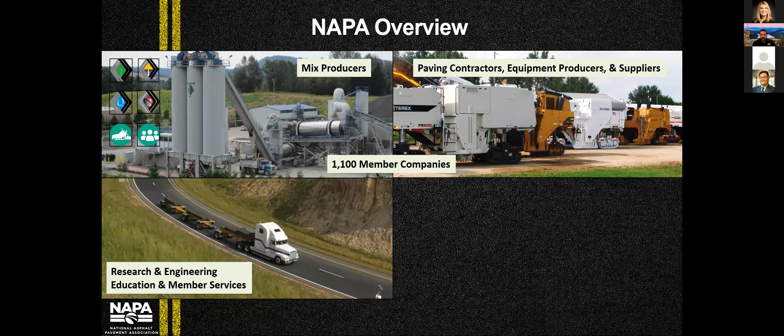We have an education and member services group, and they handle things like our meetings and webinars, which have been really popular this past year for, I think, obvious reasons, and other educational activities like that. Member services include awards, diamond commendations, and that sort of thing.

The last thing we do - we have a really good federal advocacy team. This includes lobbying on Capitol Hill for support of highway and airport investments, and also addressing environmental health and safety regulatory issues. So there's a general overview of NAPA in case you have any kind of curiosity about that.

So I'm going to start with sustainability, and I'll open by saying that sustainability is not a new concept. This is Cicero, who was a contemporary of Julius Caesar, 44 BC, ancient times by this day. In one of his writings, he was talking about Statius, who was a poet, and one of his statements was: he plants his trees to serve a race to come. This is the idea that you're looking out for the next generation behind you, and you're not just thinking about yourself, but future generations.

I think many, including myself, would argue that this is a sign of a civilized society, where you're looking forward to future generations.

When you fast forward about a quick 2,000 years, this is what the Federal Highway Administration defines as a sustainable pavement. They say sustainable pavements should achieve the engineering goals for which they were constructed, and I think that's an important first step - if you can't at least do that, then you're doing something wrong. Pavements should preserve and ideally restore surrounding ecosystems. And you might think, how does a pavement restore an ecosystem?

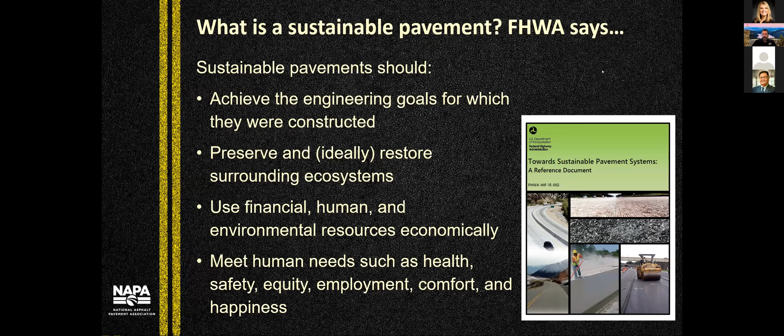So it might be work zone user delay and that kind of thing, and these are often incorporated into a life cycle cost analysis, or LCCA analysis. Then you can also think about not just the cost, but the benefits. Pavements, roadways, networks in general provide for mobility, commerce, freight, transport, and that sort of thing. So there's a lot of benefits associated with pavements as well you can think about.

From a social perspective, you can look at safety, like skid resistance. If you're using a novel material or novel mix design, you want to make sure the cars driving on that pavement are safe. Another way to look at the social aspects of a pavement is the workforce - is your workforce earning a living wage? What's the equity within your workforce and other considerations? And of course, workforce occupational safety is a component of that as well.

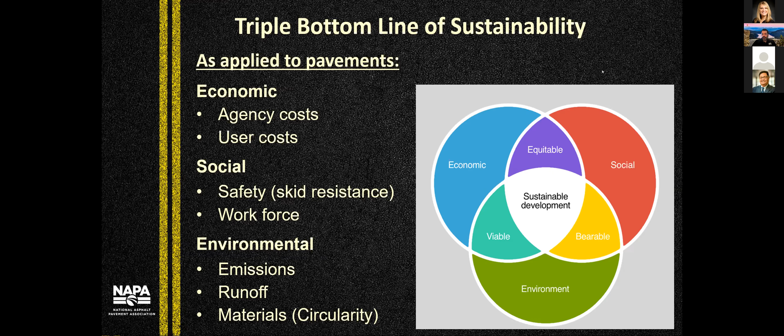So these are all ways to think about sustainability as they apply to pavements.

Now, I'd be remiss to talk about sustainability without invoking the concept of the pavement life cycle. We like to think about the life cycle starting with design, but also materials - extracting raw materials, whether it's aggregates or binders, the petroleum for asphalt binders or additives - manufacturing those raw materials, transporting them to the plant, and then mix production. These three components are typically referred to as the cradle to gate stages of the pavement life cycle.

Once you leave the gate of the plant, this is leaving the mix producer's area of control in many cases. You have transportation to your job site, construction, paving operations, moving on to the use phase - that would include things like vehicle fuel consumption, maybe lighting, and other things like that. Maintenance and rehabilitation, so this would be your mill and overlay, pavement preservation, and those sorts of activities, and then end of life. In this industry, we're a pretty highly circular economy in the sense that most of the materials removed at end of life are put right back into the mix. So that's a real positive, looking at this overall pavement life cycle.

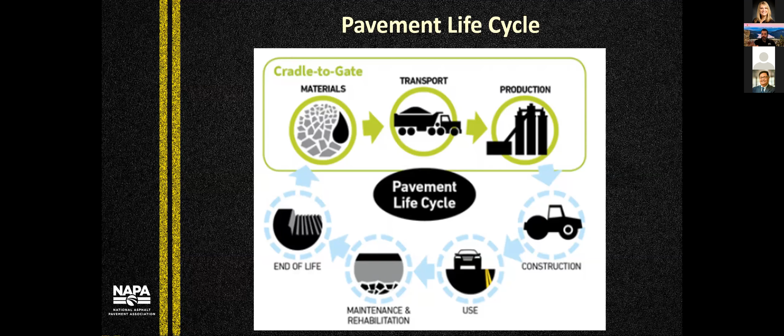So I want to talk for a minute about some of the sustainability strategies, looking at all these different life cycle stages and concepts you can apply to pavements. Looking at NCHRP this past year, they published the Sustainable Highway Construction Guidebook, and this is a really excellent read. It's for a lengthy NCHRP report, but it's actually a pretty easy read.

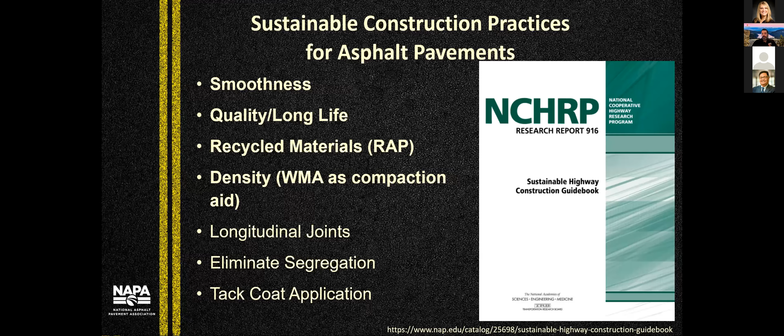Starting with smoothness. Smoothness can impact vehicle wear and tear, it can impact pavement wear and tear, it can impact fuel efficiency. I'll stop here for a second because smoothness is probably the leading component associated with pavement rolling resistance. You can make smoother pavements, and you're going to make the cars driving on that pavement more fuel efficient. This is not an insignificant value here.

When you look at the total life cycle, like I showed before, and all the emissions from a greenhouse gas perspective, the lion's share—probably 90% or more in many cases—of that impact is going to be from the vehicles operating on the pavement itself over a long, say 30 or 40 year life cycle. This will vary depending on how much traffic the road gets, but it's a really significant factor. In fact, if you could reduce fuel consumption of the nation's fleet of vehicles by 1% by having smoother, well-maintained roads, that would be equivalent to about all of the emissions from material extraction and mix production combined for the entire U.S. industry, with just a 1% improvement in fuel efficiency. So this is a really big deal.

And then other factors—noise, safety—if you can improve these things, you're going to create value for the people driving on the roads and nearby residents or businesses next to a road. So these are all things to think about with respect to smoothness.

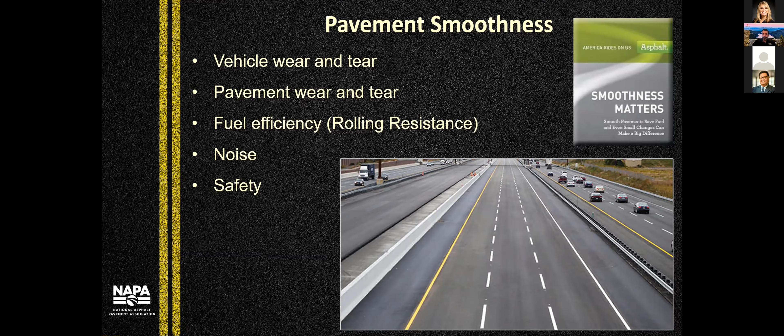The next one I want to talk about is long life pavement design, or perpetual pavements. This is the concept of designing a pavement so that it's never going to actually experience structural rutting or cracking. You're going to have to maintain the surface wearing course, obviously, but you shouldn't have to go in and do a reconstruction or redo the base. To design this pavement, you're typically going to have a higher initial cost for the agency because you're designing a pavement with a thicker section than normal. But you're going to benefit over the life cycle by reduced maintenance costs because you're not having to go in and reconstruct that pavement in the future.

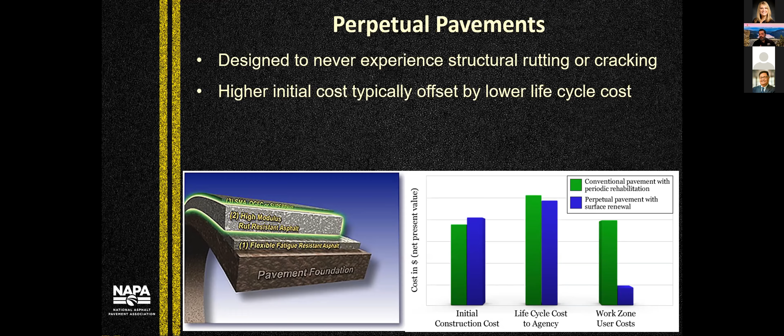So I'm going to turn here now to some material considerations. For the last 10 years, NAPA has been conducting a survey of industry on use of recycled materials and warm mix asphalt technologies. We have a great turnout on this—we get more than 1,000 plants every year that submit data. So it's a really good snapshot of what's going on in the industry.

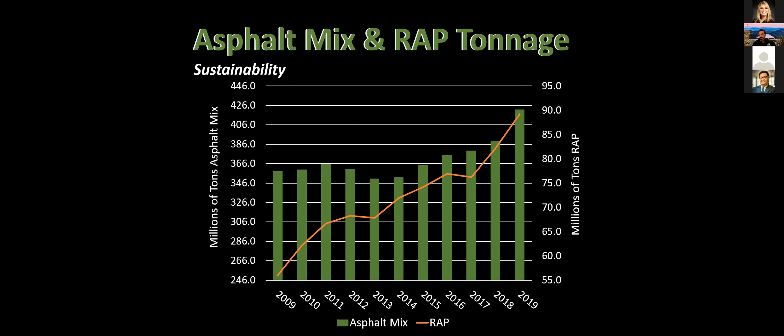The amount of RAP in an average mix has gone up from about 15% or so in 2009 to close to 21% this past year. So the amount of RAP being used in pavements is increasing. And as long as we can continue to increase that and maintain quality of our mix, quality of the pavement, and not degrade quality, then that's going to be a net positive.

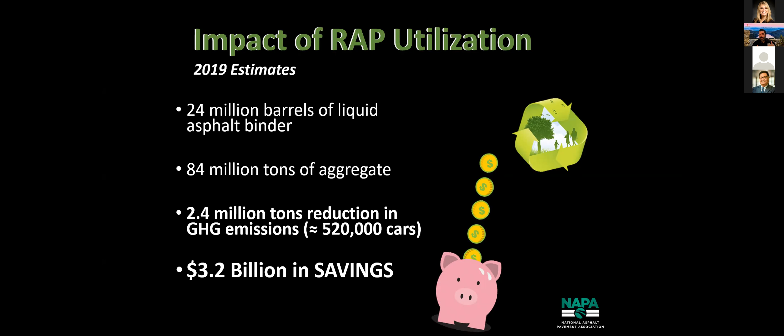In fact, when you look at 2019, the use of RAP reduced the extraction of petroleum for liquid asphalt binder by 24 million barrels. And it reduced the amount of aggregate that had to be blasted out of the ground and crushed and screened by 84 million tons. These resulted in a net savings of 2.4 million tons of greenhouse gas emissions, approximately 500,000 cars worth of greenhouse gas emissions, and over $3 billion in economic savings. So clearly we're creating value through using RAP, and this is a really good direct measure of that.

The other thing we look at in the survey is use of warm mix asphalt technologies. When we started this survey in 2009, only about 5% of the mix produced in the US was using a warm mix technology. The past 3 years, we've leveled off at about 40% of total mix production, which is pretty significant. Now, I will say that only about half of that is actually produced at a reduced temperature, meaning the other half, or 20% of the mix produced, is using a warm mix technology as a compaction aid. If you're getting better compaction on your job because of this, and that better compaction translates to better pavement durability and pavement life, even that is a significant win from a sustainability perspective.

The other thing on warm mix technologies, which I don't have a graph for, but it's in our report and worth thinking about: when we started the early years of this, almost everyone was using plant foaming technologies. Now it's about half of the warm mix produced is using plant foaming, and the other half is using a chemical additive. In a lot of cases, that chemical additive is also doubling as an anti-strip agent. So if you're getting two functions out of one material, as an anti-strip and as a warm mix, that's also beneficial for our industry.

So I think warm mix is a great technology, and I'm really glad to see the progress our industry has seen over the last decade or so.

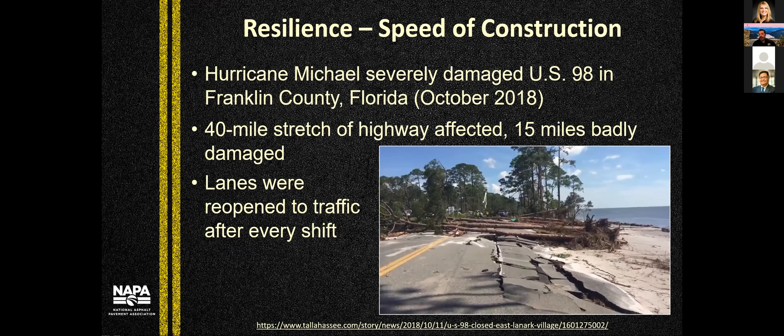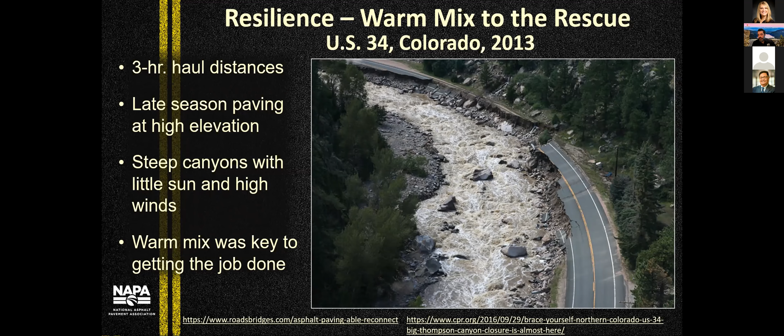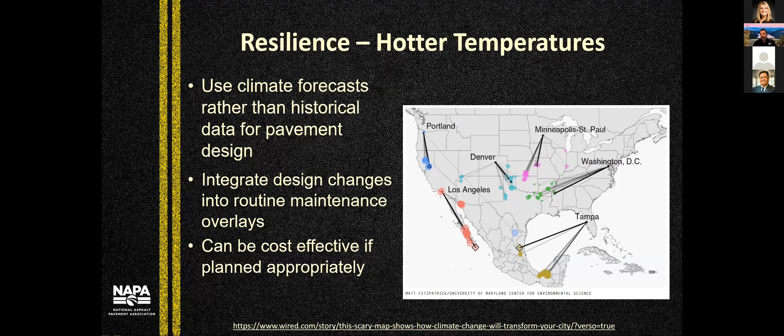The message here is to stay ahead of the game, think about the future, and start putting together the analysis you need to incorporate climate models into your pavement design programs. So that's a key aspect there.

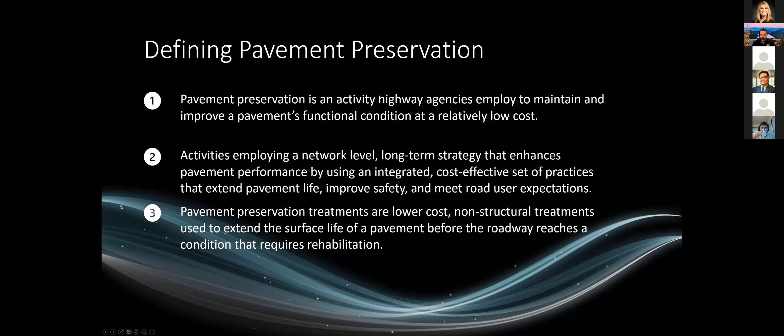All right, so the first right turn that we're going to take is picking the right road. There's a couple questions we go through when we're looking at these treatments and reviewing the projects submitted by the districts. Does the ADT support pavement preservation? Is the ADT too high? Do we have a bad mix of passenger vehicles and trucks and stuff like that?

Will the maintenance of traffic allow the construction of preservation? Some of our very high ADT routes in the Chicago area don't necessarily lend itself to being friendly to construction with preservation treatments. So it's something that we need to keep in mind and pick our treatments accordingly.

Does the pavement structure contain materials-related distresses? D-cracking, ASR, and ACR cannot be addressed by pavement preservation strategies. And is it something that we necessarily want to address? In some cases, pavement preservation strategies can actually accelerate these materials-related distresses, and it's probably not a good idea to apply those.

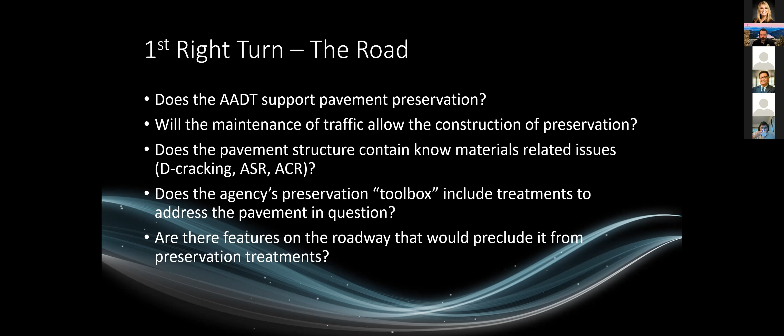And finally, are there some features in the roadway that would preclude it from preservation treatments? The first thing that came to mind for me was centerline rumble stripes.

These are coming into play a lot more in Illinois from the safety aspect, trying to keep lane departures at a minimum, but it also kind of inhibits the use of some of our pavement preservation treatments, because while they're really good at preserving the surface, they can decrease the effectiveness of these rumble strips. Your microsurfacing, cape seals, and chip seals will tend to fill these rumble strips or rumble stripes, decreasing their effectiveness. You'd have to come back through and grind them again, reducing the cost effectiveness of pavement preservation treatments, and potentially the possibility that you're getting a good seal from the environment on that roadway.

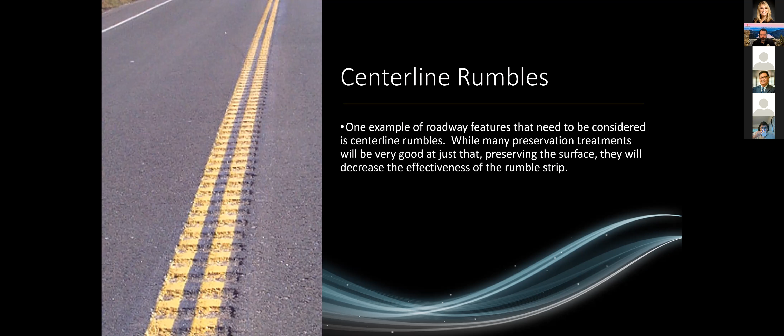So moving into the second right turn, appropriate timing. Is this roadway still in good condition that we can preserve it and keep it in a good structural manner? Do we have a good balance of service life of the existing surface and minimal distress to allow for pavement preservation? Are we at the point where we're going to maximize the effectiveness of the preservation treatment, and yet we've got a good amount of service life from the existing surface, whether it be PCC or HMA?

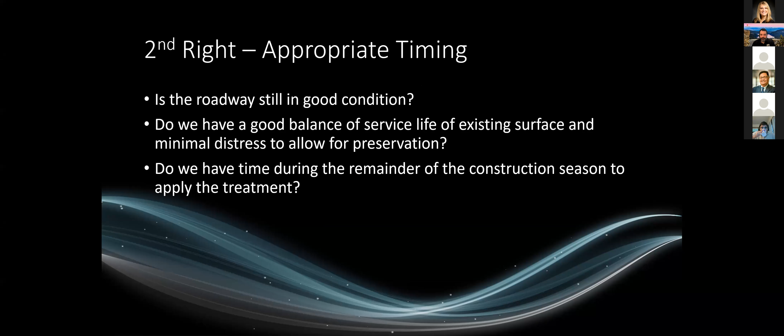Do we have enough time in the remainder of the construction season to apply the treatment? A lot of our pavement preservation treatments are very subjective to the weather. So if we apply it too late in the season or too early in the season, we might be doing more harm than we are good.

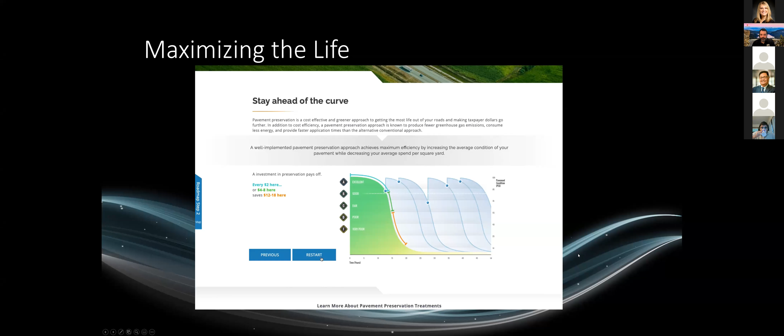All right, so the last slide on timing. There is a delicate balance. Montana and South Dakota both seal cracks after the first year of construction of a new surface, and then place a chip seal or microsurfacing after 2 years of construction. They want to get on it really early to prevent oxidation and any weathering and raveling that could happen, and it seems to be benefiting them well.

In my deeper look into IDOT's projects and our selection, the districts around the state are generally selecting projects that have a CRS of about 6.5. That's well within the good category according to our CRS scale. I think we're headed down the right road. We could potentially be picking things a little bit earlier to give the preservation treatments more of a chance at reaching their most appropriate service life. Other reports and studies have stated that approximately 5 to 7 years of life prior to a treatment is ideal.

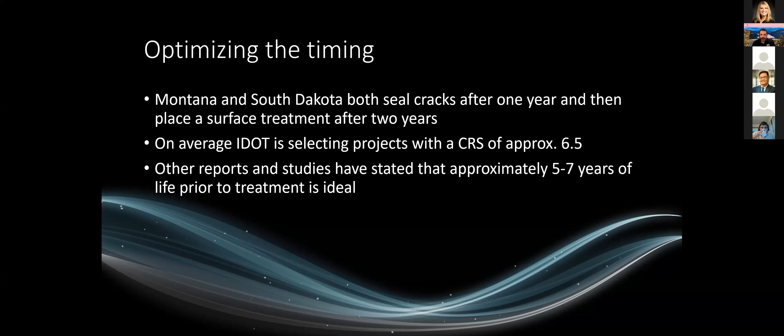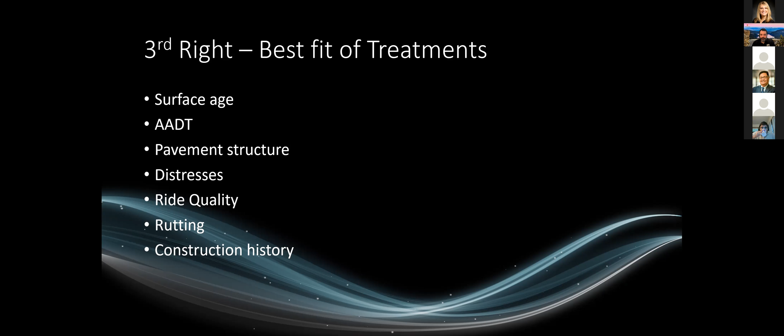So on to the third right turn: the best fit of treatments. Here we take a deeper dive into the actual data available in IDOT's pavement inventory. We're looking at surface age, average annual daily traffic, pavement structure, the distresses present on the roadway, existing ride quality, rutting, and construction history.

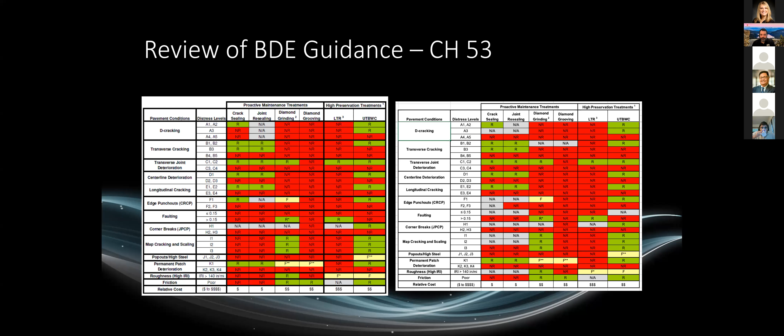So that's the concept behind the revisions. We've done that for both the full depth HMA pavements. This here is our charts for composite pavements. And then finally, we've made some revisions to the concrete preservation. As you'll notice, there's a lot less that we can do for preservation of concrete treatments as opposed to asphalt-based surfaces.

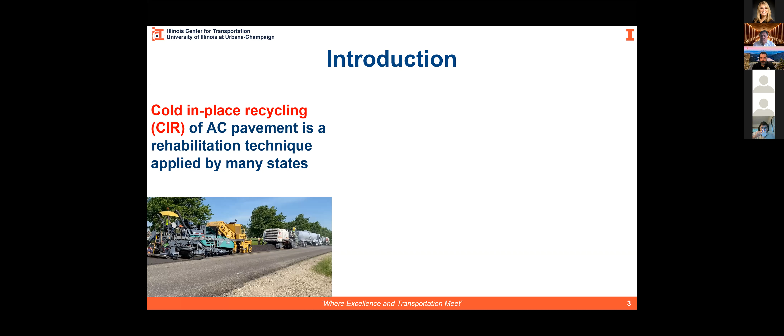It has been applied for secondary roads and recently has been used in Virginia for primary roads, like the interstate highway. This technique is really desirable for several reasons. First, the material is recycled in place and we can open traffic in a very short period of time, and there is significant saving when it comes to cost as well as impact to the environment.

However, there is a challenge, which is when to open this road for traffic. As you know, cold in place is just recycling the material in place and adding engineered emulsion or any other emulsion, and there is an amount of moisture involved. So in order to open this to traffic, we need the moisture to evaporate, and this is going to require some time. What is the time and what is the threshold? In Illinois, we're considering 2% moisture as the threshold to open the road for traffic.

Also sometimes we need to place the overlay at a specific period of time. So we need to know when the water has evaporated, so we will not have stripping problems in the future, and also get enough strength.

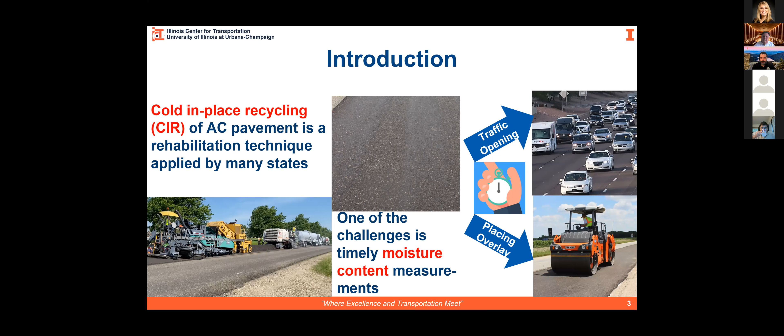In order to do that, there are a few approaches. One is to look at the structural capacity gain of the pavement itself. There are a couple of methods. One is the lightweight deflectometer, which applies a load from a specific height over a circular plate and measures the deflection, and from that we get the structural capacity of the pavement. The other is the DCP, where you have penetration of the pavement, which is very appropriate for granular material. You raise a specific load and drop it from a specific height and see what the penetration is, and that correlates to the CBR of the material.

I wanted to mention that there are two lightweight deflectometers: one for granular material and one for asphalt. I'll mention later that the one for asphalt is the one that worked really well for us, but the one used for granular material did not work as well.

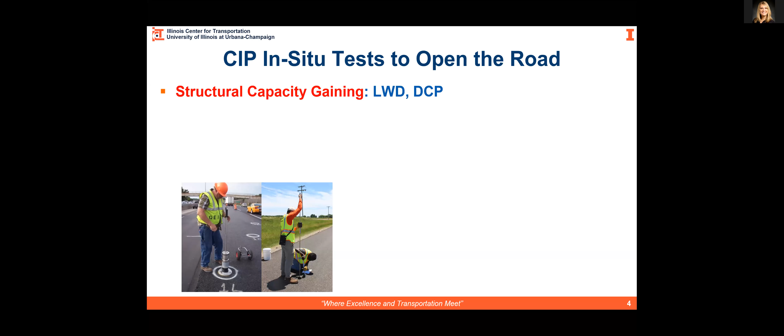The other technique currently used in the field is non-destructive testing, such as the nuclear gauge. There's also in situ density measurement using a sand cone, where you dig a hole and fill it with Ottawa sand, and knowing the volume and density of the Ottawa sand, we can calculate or back-calculate, by knowing the weight of the material extracted from the hole, the density of that material.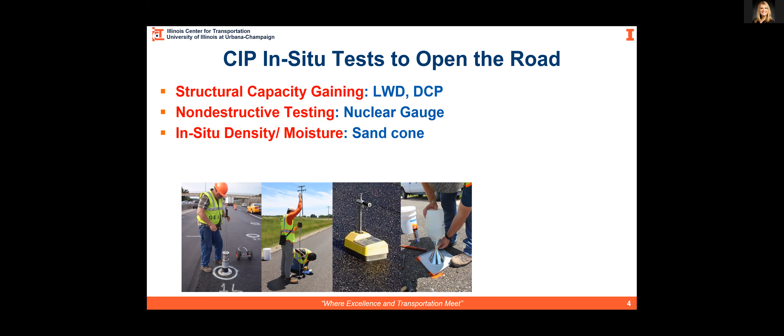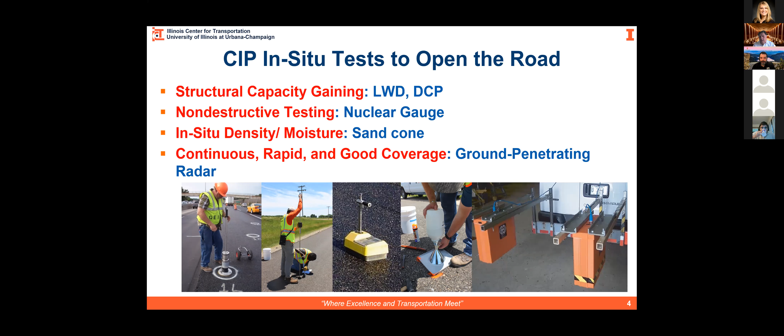However, all these methods are localized spot tests and are time consuming. Another approach is to have continuous, rapid testing with good coverage, using ground penetrating radar. For the use of ground penetrating radar for moisture content monitoring, we need to do field testing, simulation, and some theoretical and statistical analysis.

So the steps went like this: in the same place that we were taking material samples for measuring moisture in the field, we were also taking measurements by GPR. It is known that from GPR measurements we can calculate the dielectric constant, and we have the moisture content. The dielectric constant increases as the moisture content, or free moisture content, increases.

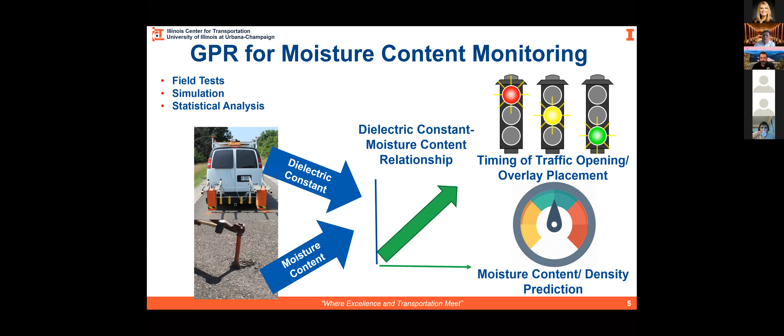From this, we'll be able to calculate the moisture content as well as predict the density. Ultimately, we're trying to give some indication about the threshold for the agency and the contractor, for when to open this road for traffic or when to place an overlay.

Let me explain how the radar system works, especially since yesterday there was a question about the GPR. The GPR works the same as radar used to detect airplanes. You send electromagnetic waves in the air, it hits an airplane, which is metal, and reflects completely back. We know the time it takes for the wave to go and hit the airplane and come back, and knowing the speed of electromagnetic waves in the air, which is the speed of light, we'll be able to know the distance.

We have the travel time for the signal to go and come back, and we know in addition to that the speed. So it's easy for us to back calculate or determine the distance. That allows us to use this technique for many things, including detecting mines, because they have complete reflections if you have metals there.

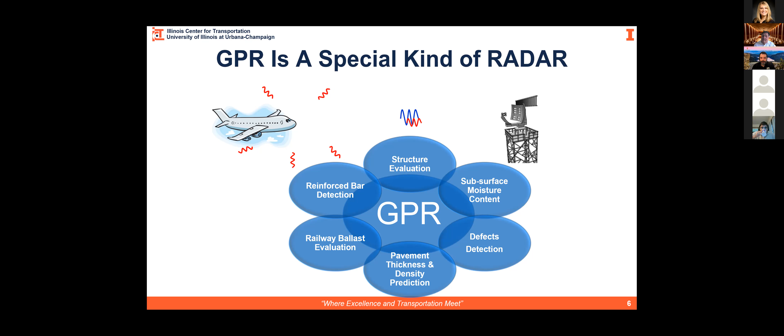We can try to detect where there is reinforcement in concrete, see if there is contamination in railroad ballast, and for pavement we use this to determine the density and predict the pavement thickness. So let's see how this works for pavements.

Simply put, we have a DMI, or digital measuring instrument, distance measuring instrument, and or a GPS. We like to use a combination just to make sure that we have all the data needed. It goes to a unit that generates the pulse. The pulse goes to the antenna, and the antenna starts sending these pulses into the pavement.

As the dielectric constant, or let's call it the electrical properties for the time being, for the pavement is different than the air, some of these pulses will be reflected while others will go through. Now when this encounters a different material, such as the base, some will be reflected, some will go through. So we collect all these reflected signals and try to understand the dielectric properties of this material.

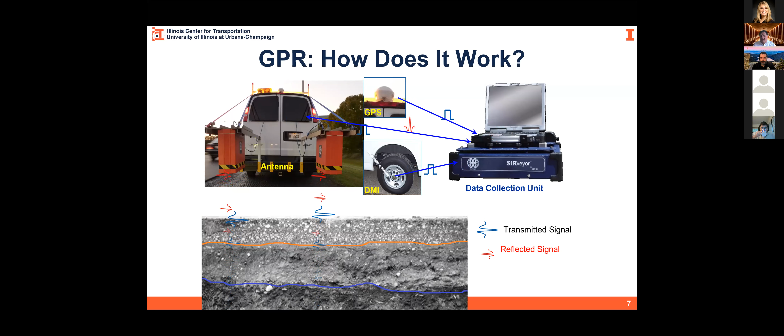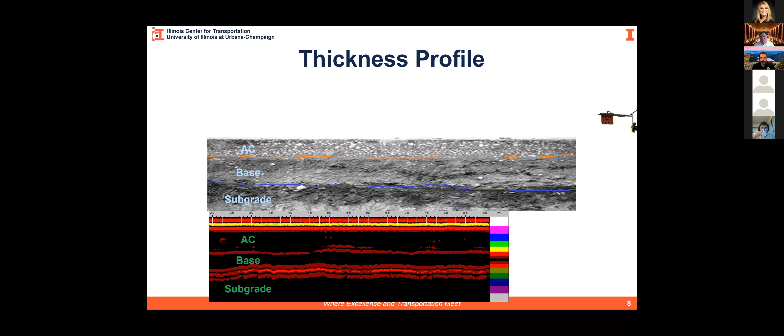So what you are seeing usually in the GPR is a van driving like this, and you have a complete reflection every time we send these waves, and you get a profile. You stack all these profiles together and you see something like what you're seeing here on the screen, which appears, because of the reflections, as if you are seeing the different layers of the pavement. So you're not having an X-ray here, it's just the reflections happening at the interface.

Let me explain this in a different way too. Let's assume that you have three materials: one is dry sand, one is wet sand, and one is saturated sand.

Water is a very lossy material, which means the dielectric constant of water is very high compared to air. The relative dielectric constant for air is 1. Water is 81. Asphalt is around, depending on what kind of aggregate we're using - asphalt binder is around 3. Aggregate limestone is around 6 to 7, maybe 8. Quartzite is around 4, maybe 5.

So now when we have an idea about the materials we're dealing with, we know how fast this electromagnetic wave is going to go. If you have dry sand and the dielectric constant is maybe 6, the electromagnetic wave is going to go very fast. If you add water to it, it will slow it down - it becomes maybe 15, because the dielectric constant increases, slowing it down. If you increase the water, it will slow it down more.

We can express this in a relation: the velocity of these electromagnetic waves is the velocity in air divided by the square root of the dielectric constant. That's simply the whole concept of the GPR.

Now we can take this and use simulation to see how the electromagnetic waves will penetrate into different areas. We use this concept to understand the dielectric constant of the material. So if we're using a GPR, we need to know two things: one is the pulse that we send, and the pulse that it's reflecting.

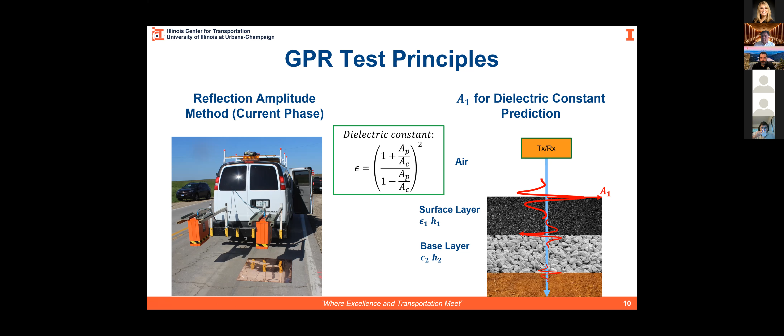Please notice here that these reflections are from the surface, and that's what we're going to be discussing today. I'll mention at the end what the plan is to do in the future, to make sure that we look into the whole bulk of the layer.

Based on this introduction, there is something we can use called the mixture theory to allow us to correlate the dielectric constant of the different materials to that of the asphalt. Look at the asphalt concrete here as a mixture. It consists of different components.

The dielectric constant of the concrete is something we can predict from the reflections I showed in the slides earlier. The asphalt concrete consists of binder, which we know the dielectric constant of, and we can know the volume of the binder in the mix from the mixture design itself. We know how much asphalt we put in, and we know the specific gravity for the asphalt, so we will know exactly the volume of the asphalt in the mix from the mixture design.

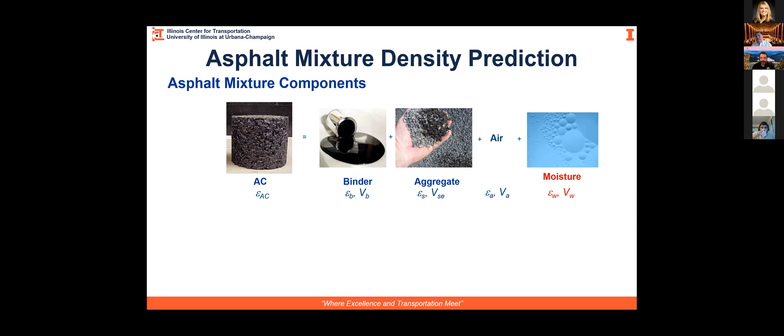The amount of aggregate is the same, but we need to know the dielectric constant for the aggregate, which we can back calculate. The dielectric constant for air is 1, and we have the air void, which is unknown because that depends on the density. We can add another variable to make it even more complicated, which is moisture, and this is the case we have in cold in place. So that's why it's a challenging problem.

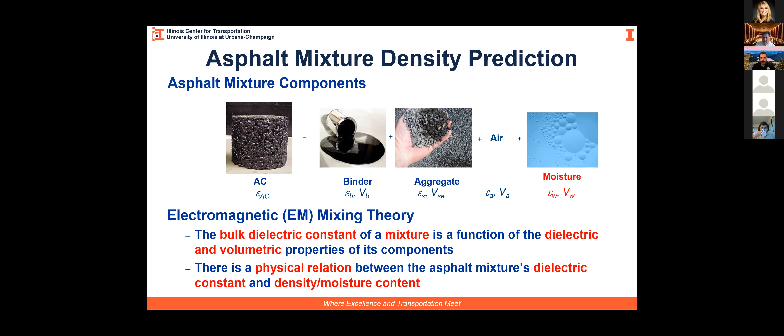So the whole idea of the mixture theory is that the dielectric constant of the asphalt concrete is a function of the dielectric constant of each component and the portion or partial volume of each one of these components. For example, air is 5%, dielectric constant is 1, moisture's dielectric constant is 81, and we have let's say 2% by volume moisture, and so on for the rest. If we know these components and their dielectric constant, we can correlate or equate that to the dielectric constant of the asphalt concrete. So this is the whole concept.

So if we know the dielectric constant of the asphalt concrete, we can know the density of the asphalt concrete and predict that. 10 or 12 years ago, we developed a model that has been used by many, called the ALL model. This equation may appear complicated, but it's actually very simple if you look at the items or terms that we have.

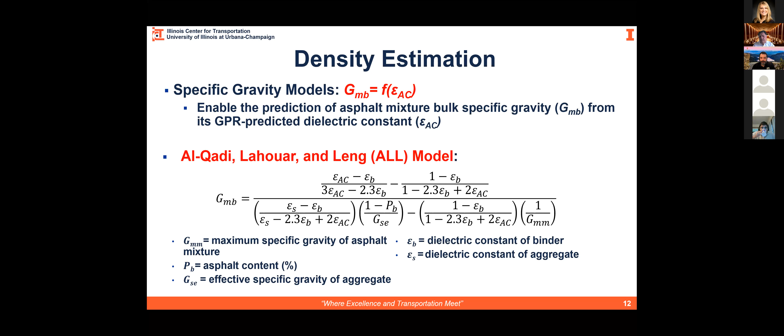It just depends on the dielectric constant of the components, the binder and the stone and the asphalt concrete, as well as the specific gravity of the different components. From that, we can calculate the density. We know the maximum theoretical specific gravity, the big G, so we will be able to calculate the air void. That's how we determine the density.

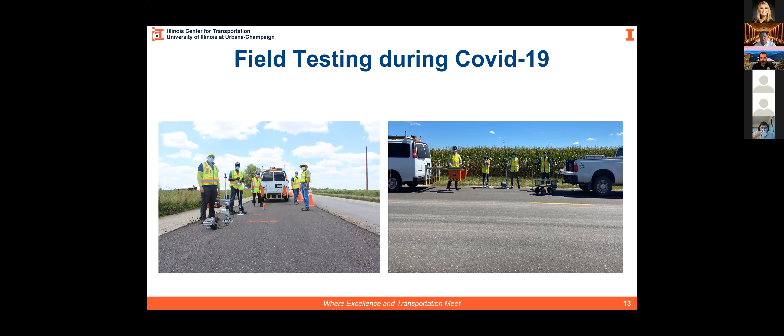So let's go to the field here. We started this project in May. At the minute we started, we had to go to the field because there were a few projects to start, and at that time COVID-19 started. I wanted to thank Greg Renshaw for all the safety measures he had for the crew to go to the field and do the measurements.

We have several sites that we looked at. Four of them are cold in place, and one has the recycling happening in the plants, a plant recycling called central plant recycling. I will discuss one of these sections; they are all similar. There were 3 in District 4 and 1 in District 5, and then we have the plant one.

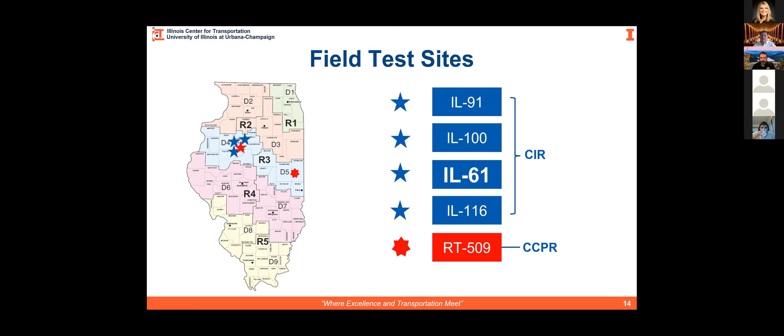The first thing we did is go there, sample, and put this material in 2 Ziplocs and take it to the lab to do the measurements for the moisture content, and for the sand cone -- I'm sure many of you are familiar with it. We dug the hole, took the materials, and of course put it in the Ziplocs.

Then after that, we put the sand, the Ottawa sand, in to fill it. We know the volume of the sand and we know the specific gravity, so we know what we placed in the hole itself, and that allows us to calculate the density.

Now for the lightweight deflectometer, that was used to measure or estimate the modulus by measuring the deflection from the load applied. As I mentioned earlier, we used 2 of these lightweight deflectometers. One is designed for granular material and it didn't work very well, and one is designed for asphalt concrete and that worked really well.

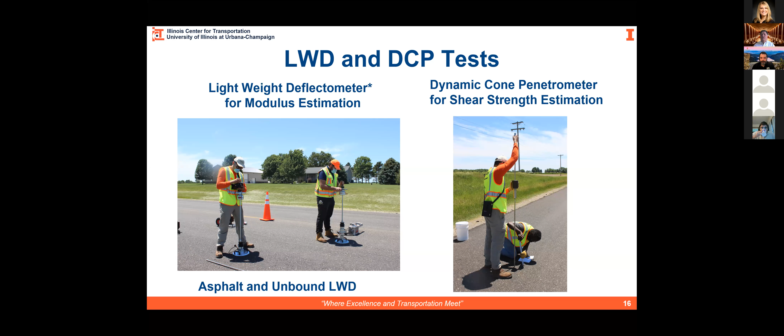We used this earlier in the first warm SMA mixes maybe 10 years ago, on a tollway project. We also used the dynamic cone penetrometer to get an estimation of the shear, or an estimation of the CBR.

As to the GPR test, we first measured the copper plate to know what kind of signal we are sending, and we marked the spots so we could come back at regular intervals and take measurements on the same spot. Every day we did measurements, we had to do a calibration for the system, which I'll be happy to discuss later.

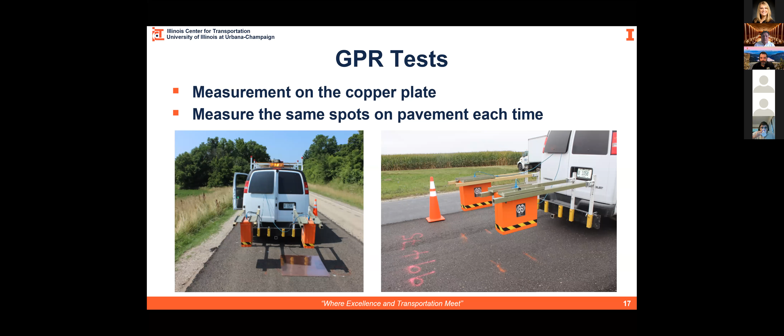Here is some information about the project: 61. It has 4 miles and is 2 directions, with 1 lane in each direction. The cross slope is around 1.5%, which impacted the thickness they were milling and placing. The lane width is 13 feet wide, and we have 2 shoulders, one at 3 feet and another similar.

We started the cold in place recycling at station 827 plus 50 and ended at 1039 plus 05. The depth of the cold in place recycling was 4 inches, and engineered emulsion was used in this project.

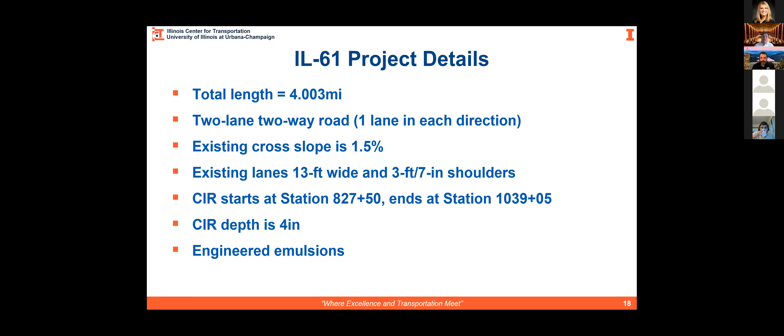Another important thing to mention is that moisture, when free, gives us a dielectric constant of 81. However, if it's bound—not breaking from the emulsion—it gives a very low value because it's bound or restricted from movement. For water to give the high value of 81, it has to be free to move, so the dipole of the water moves and causes polarization.

In this case, it will be impacted by rain, and also impacted if it's breaking from the emulsion or still attached to the emulsion.

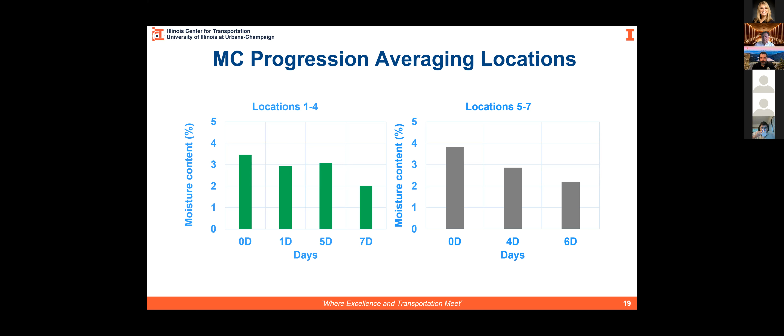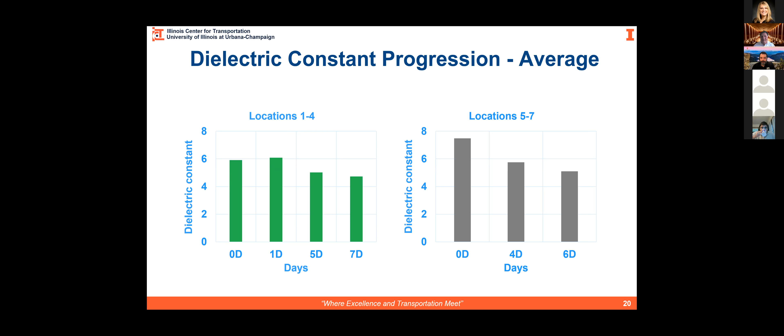The dielectric constant is not measured directly by GPR, it's predicted from the GPR measurements. You can see there's a trend going on, more clear on the second day—we became more trained in the second round. The trend shows the breaking of the water impacting the first couple of measurements, but after that there's a clear trend going down.

This was more clear on the second day, where you can see a trend going down very clearly in the measurements on the second day of paving.

What we did was work on a mixture theory. This theory correlates the components of the cold in place recycling material and its dielectric constant, with the portion of volume corresponding to each material, in order to come up with the dielectric constant for the whole bulk cold in place recycling.

We're working on this theory right now, but we are very encouraged. As you can see, the predicted line in black and the measured line in red show a very nice prediction, and this will be fine-tuned as we move forward.

This is based on a corresponding copper calibration for the measurements. If we do the calibration overall for the whole 7 days of measurements, you can see we have a similar trend, and again it was able to predict the reduction in moisture. As the predicted dielectric constant is reduced, this means the moisture content has been reduced in the mix.

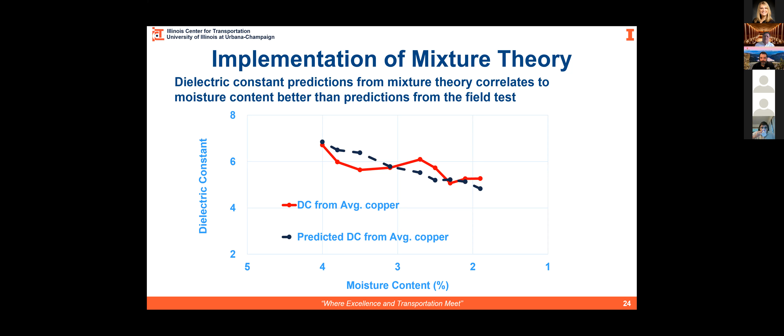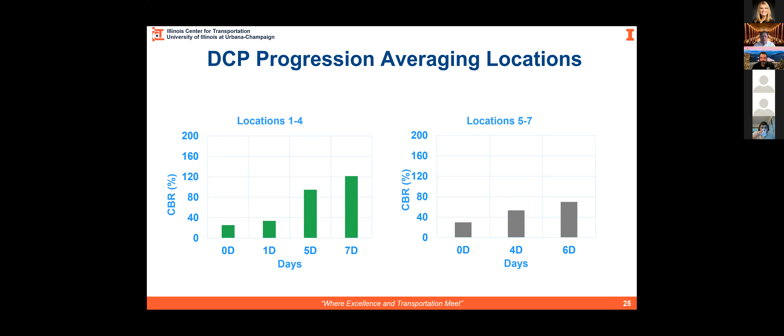If we look at the DCP, you can see clearly that there is a gain in the CBR of this material as time passes in both locations 1 to 4 and 5 to 7. And the same for the modulus.

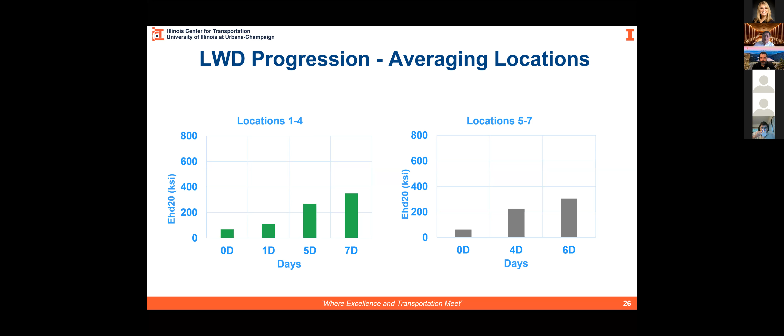I'm showing the data from the lightweight deflectometer for the asphalt, because as I said, the one for the granular material didn't work very well. You can see here that there is a gain in the structural capacity of the material as we move.

Something interesting here is that the cold in place does not pick the density that people may expect. The density was usually in the range of, like, 80% or so. So the air void varies from as low as 16% to as high as 22.

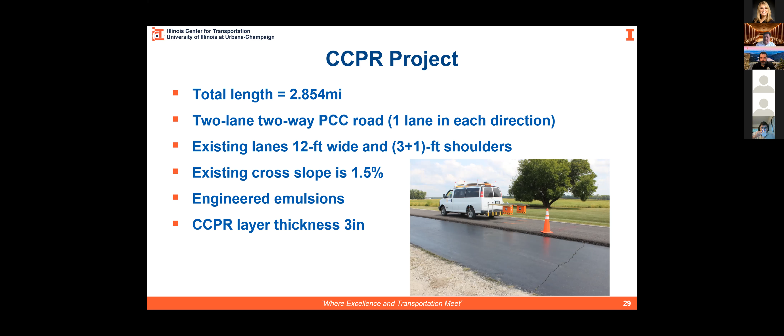For the central plant, similar, it's 2 lanes with 1 lane in each direction, and the width is 12 feet with a shoulder of 3 to 4 feet, or 3 plus 1 feet, but in general it's like 3 to 4 feet. Same slope we have. We used engineered emulsion, the thickness of the layer is 3 inches, and the length of the road was

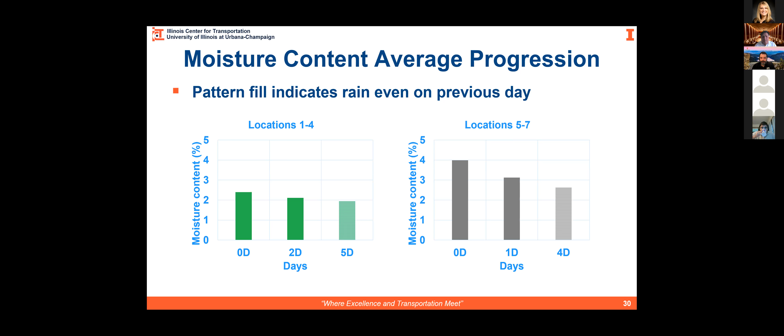The dielectric constant, you can see there is a little reduction here, and it was more pronounced in locations 5 to 7. Again, if we implement the mixture theory, we can see here that we have some really good correlation. As the moisture is decreasing, the dielectric constant also is reduced.

We have a preliminary mixture theory that we're working on in order to calibrate it as we are collecting more data, so we can predict the moisture content more accurately in the field.

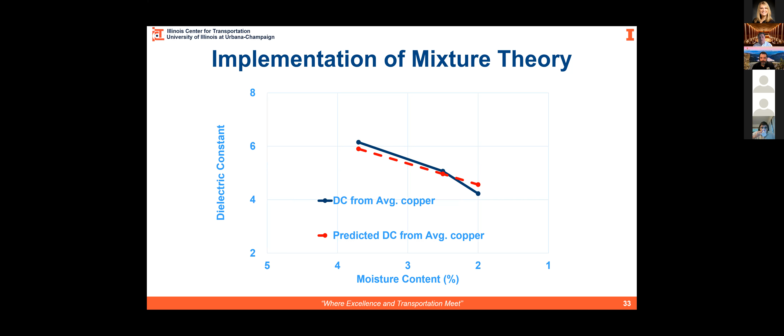This could be done by the dynamic cone penetrometer or lightweight deflectometer, or we can use sand cone. However, any of these techniques are time consuming. They are spot measurements, so they are very localized, and they will not give us an idea about what's going on in the project. They don't have good coverage.

If you take measurements every 500 feet, you are still not covering, I guess, even 0.1% of the area, much less than that. So we don't have very good coverage.

On the other hand, the GPR will give us the coverage. You drive at highway speed, and it can be real, or right now it's near real time. So it can be done very quickly, but ultimately our goal is to have it as real time by the end of this project.

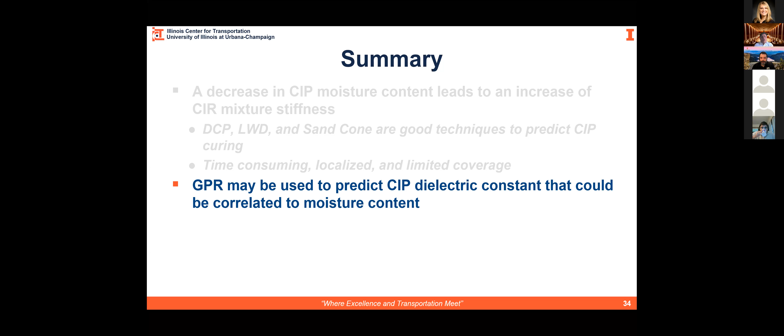From that, we can predict the dielectric constant and correlate that using the mixture theory to the moisture content. So preliminary work shows some good success.

Given that the moisture does not just exist on the surface, we're working also on the modified CMP method, which will allow us to measure the dielectric constant for the whole layer. This is a method that we modified some time back, but we never used it for the cold in place recycling. So we will be able to modify this technique and try to use it in the second season for measurements.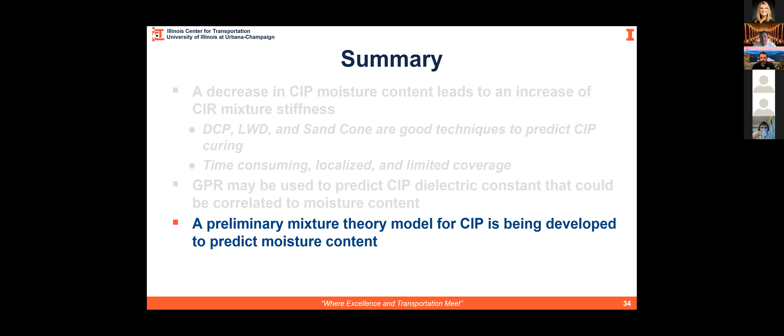Again, I wanted to finalize by saying that our goal here is to take the GPR measurements, and from that, use it to predict the dielectric constant, regardless if it's going to be from the surface or using the modified CMP method for the whole layer.

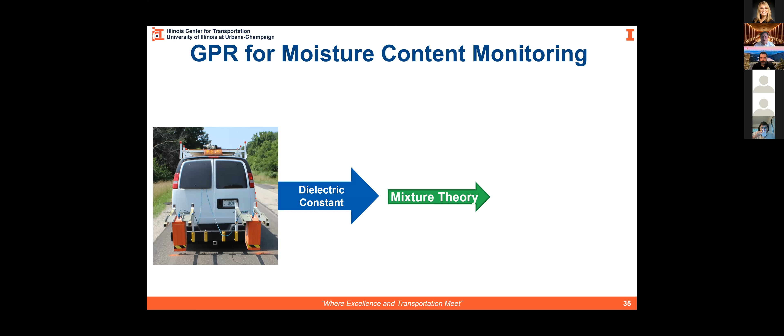Use the mixture theory that we're working on right now, which will allow us to predict both the moisture content and the density, and ultimately provide you with the time when the road is ready.

So the data that we get is going to be presented in a very simple way with a traffic light, saying that this is not ready. When it's getting close to 2%, we'll say it's getting ready. And if it becomes 2% or less, that's when it's ready to open to traffic, or ready to overlay.